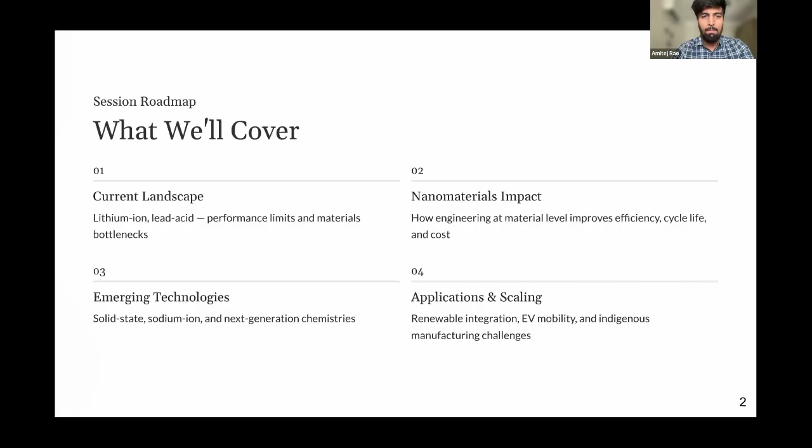So today, as we move ahead, everyone knows that batteries is the most hot topic as of now, and the reason for that is, we as the whole United Nations and as countries, everyone has to achieve net zero goals, and to achieve those goals, two most important sectors where we need decarbonization is number one, the mobility sector, because automotive transportation sector accounts for second or third largest CO2 emissions in the world. And second is the power sector.

Right now, people use coal and gas to convert heat into steam and then into electricity. So two of the major sectors which need decarbonization are the automotive or transportation sector, and the power generation sector. Now, where do the batteries come over here? So, in general, batteries can be of two types.

Number one is the primary battery. This is generally a non-rechargeable battery, which we all use in our TV remotes or AC remotes. These are non-rechargeable, like the Duracell battery. These alkaline batteries last for a lifetime, and these batteries do not need any recharging.

And the second type of batteries is the secondary batteries, which we call rechargeable batteries. These batteries can be recharged again. Example, lead acid battery, lithium-ion battery, sodium-ion battery. These are the dominant chemistries out there on the application side. So this presentation would focus on the secondary application, which is the rechargeable battery, not the primary battery.

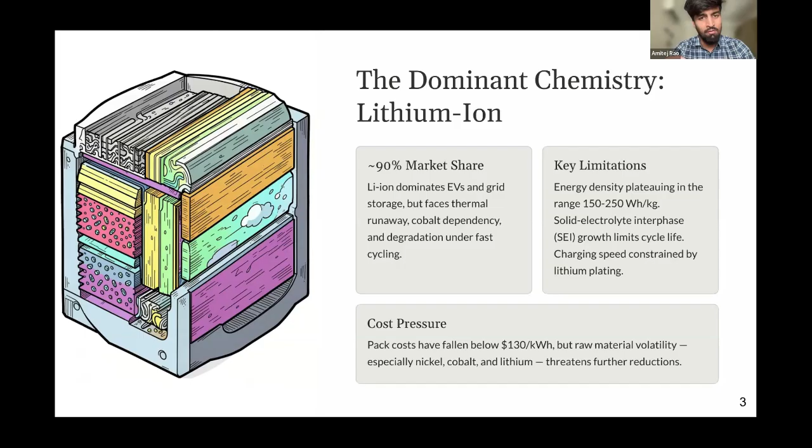And last but not least is the cost. These batteries generally use critical materials like lithium, nickel, cobalt. As of now, the costs have fallen because of high usage, but there is also shortage on the supply chain side. So the material cost is rising, and these materials are concentrated in certain geographies, and the supply chain is a vulnerable issue as of now.

So talking about the challenges, lithium-ion's number one challenge is the explosions that you've heard of. This is nothing but a thermal runaway happening inside a battery. The reason for this is lithium-ion batteries use a liquid electrolyte which is solvent based, ethylene carbonate and dimethyl carbonate. By nature, these are highly flammable and volatile solvents. If during charging or discharging the temperature of the battery rises, this electrolyte catches fire and it leads to thermal runaway, and dealing with battery fires is a different ball game altogether.

It cannot be dealt with like a normal fire. Battery fires, you've all seen the videos. It is a chain reaction, a kind of runaway reaction. It increases exponentially. Second, the supply chain is an issue, and also the solid electrolyte interphase degradation, which causes the cycle life to go down.

Talking about lead acid, solid chemistry, but it suffers from lower energy density due to a simple reason that the chemistry is not as advanced as lithium ion. It has a shorter life cycle as compared to lithium ion, but still it is able to provide certain applications which do not require that much amount of life. It is heavyweight, and the volumetric energy density is also very less. So this is a very good application.

Lead acid, still all the automotive batteries that we use, all the say inverter batteries that we use as of now, it is used in telecom industry. It is used in say golf cart, forklifts, and all the stationary applications. This chemistry is still preferred. The reason is the lower dollar value. It's very cheap.

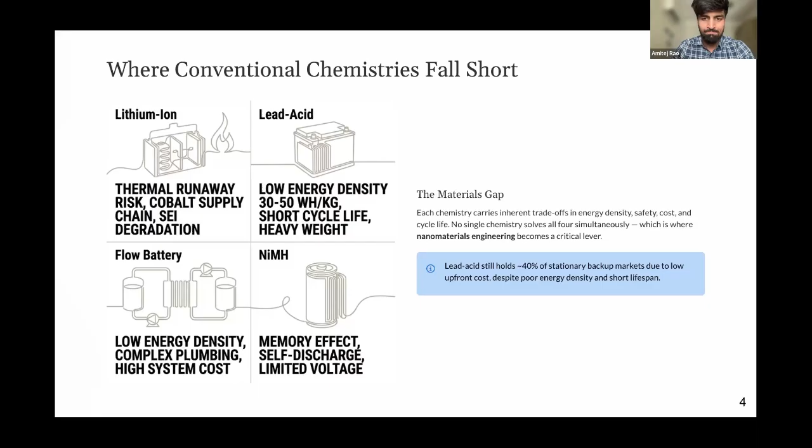So these are certain challenges, but how can we address these challenges using materials? Because this is an electrochemical device, which means that the chemical energy is getting converted to electrical energy and vice versa during charging. So the chemicals used and the materials going inside are the main crux of the energy providers. So we would need innovation, and we are doing innovation in materials to solve all these challenges. So how do we address this? Using nanomaterials, using nano engineering at an atomic scale. Number one, using some advanced materials.

In a battery, imagine that we have an electrode, right? In that electrode, there are certain electrochemical reactions which need to happen. Taking an example of say lithium-ion battery, on the anode, particularly people use graphite. In graphite, the reaction happening is the lithium intercalates between the layers of graphite. It goes and sits between the layers of graphite. Now, the amount of lithium ion stored will determine the capacity of the battery, and the speed of this storage will determine the charging speed.

So the anode materials and the cathode materials and the electrolyte materials have to have certain specific properties. When we talk about electrodes, number one, we need enhanced electrode conductivity, which is electronic conductivity and ionic conductivity. It also needs reduced internal resistance, which means when the reaction is happening, the kinetics should be much faster, and the temperature rise shouldn't be as much, because if the temperature rises, then there is a safety risk.

So number two, the anodes, which is the most important part. Right now, in lithium-ion batteries, people have started using silicon carbon composites, silicon and porous carbon composites. As of now, the challenge with graphite is it's only able to provide an energy density of around, say, 200 to 250 watt hour per kg. But when we use silicon as an anode, it multiplies by 4 times.

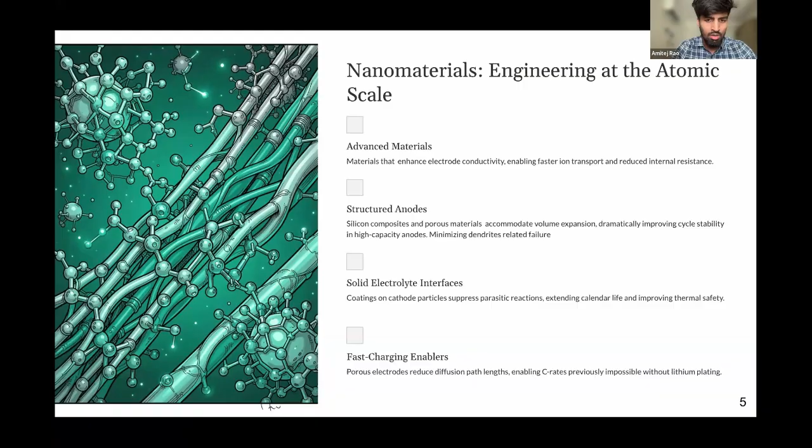So these are the different trade-offs of how to use materials. It's a very delicate balance of material properties and their impact in the electrodes, and their impact in the overall cell and the battery technology. So going forward, what advantage do we get through using these nanomaterials and all those things?

20% higher cyclic life gain. Imagine a conventional EV gives a warranty of 5 years. Using nanomaterials, we can get an easy 6 to 7 years warranty. And because of this, the total cost of ownership will go down, because the battery would now be running longer, right? So the vehicle life would by default increase.

And mind you that today, for all the EVs that we are running, 50 to 60% of the cost is just the battery cost for any electric vehicle. So the battery is the main engine. It's the heart. So if we increase the cycle life, by default, the features, the power, the vehicle OEMs increase those features using just the innovations in the batteries.

We also aim for resistance reduction by 40%. And why is this important? Again, to stop thermal runaways inside batteries, we need to minimize the risk of explosion, and we need to keep the temperature on the lower end. So we need materials and electrodes that reduce the internal resistance of the battery. And it's a very simple test, which we call electrochemical impedance spectroscopy, through which we understand the charge transfer resistance and all the resistance inside the electrode.

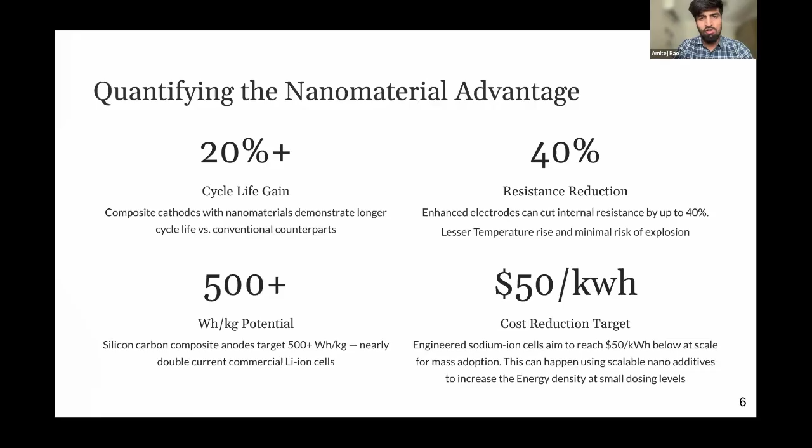So this is the challenge that we all have, and we all have to solve this through materials and design. It's an interdisciplinary sector, but as chemical engineers and as material scientists, we need to solve this issue through materials. So going ahead, what are the emerging battery technologies?

Solid state batteries. What is it? It is nothing but a lithium-ion battery, or any chemistry battery, where the electrolyte is solid, semi-solid or gel type. Right now we are using liquid electrolytes, organic solvents, which are flammable. So we need to replace those with ceramic or polymer, quasi-polymer electrolytes, which offer lower weight, meaning the energy density is going to increase, and they also provide lower flammability risk. There is no flammable material inside, so the batteries would be safe. Companies like Toyota, BYD and Solid Power are already targeting commercializing these batteries by 2027 and 2030.

So this is an upcoming thing. The only difference over here is the phase of the state of electrolyte. It's just solid rather than liquid.

Second is the sodium ion systems. We all know lithium supply chain is a vulnerable issue. We need to shift from critical materials to materials which are abundant in the earth. Sodium is 200 times more abundant in the earth's crust as compared to lithium, and the cost is also very less. And India has a lot of reserves of sodium as compared to lithium.

People have found lithium reserves somewhere in Bangalore and somewhere in Jammu, but that is still in the exploration stage. Getting to the exact mining stage is going to take at least 20-25 years, and that is a long time for any battery chemistry to sustain, right? And we cannot be dependent on other countries like China, because 95% of all the battery materials are routing through China only. They own the mines. So we need to shift to chemistries which have more abundant materials.

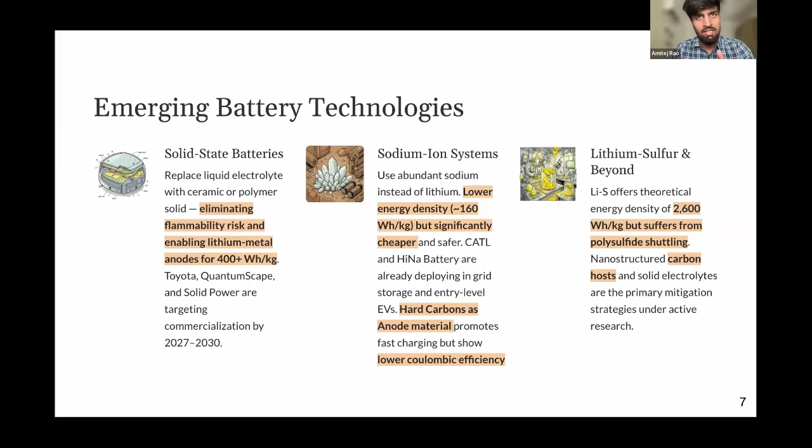The real world applications: number one, we all know that to achieve the net zero goals, we need solar, we need wind. These energy generation sources, solar and wind, are very intermittent in nature. Solar only runs for say 8 hours in the day, and in the night time it does not provide any electricity. So what is the solution? The solution is that we need to store the excess energy inside batteries and use it during the night time. So storage is important to address the intermittency issue of these technologies, wind and solar.

And these batteries need to be such that the dollar per kilowatt hour is lower, and they provide stable 4-hour duration storage. That is the normal storage that we need.

Second application, electric mobility. The most important factors when it comes to mobility are energy density, charging speed, and safety, safety being the most paramount factor here, because if we provide cells which are low quality, which do not have those kinds of safety standards, it is going to result in more and more catastrophes, and in lower adoption of EVs, and we will not be able to meet our net zero goals by 2030 or 2047.

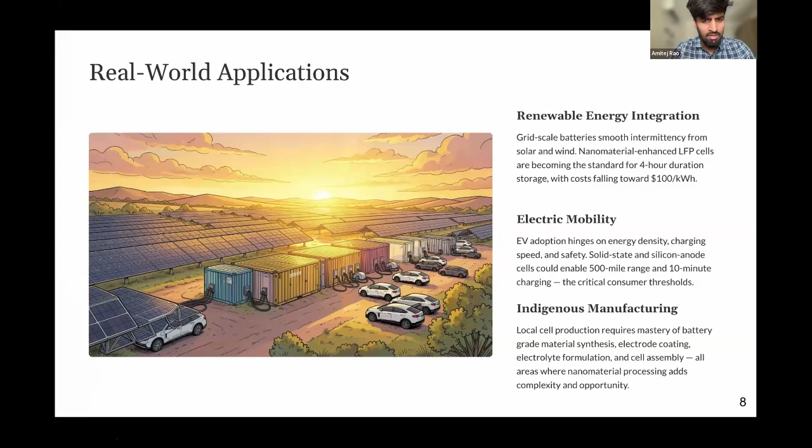And with nanomaterials, sometimes the processing techniques are actually very complex. Scalability is an issue. So challenge number one, scalability. At lab scale, we all know a lot of innovations happen every day, but these nanomaterials are difficult to produce consistently at ton scale. Important parameters like process control, purity, and cost still remain a barrier to commercializing these materials. So we need extreme customization and engineering to take this material from lab scale to pilot and then to commercial scale, all within an acceptable cost range, so that we can make its adoption easier and acceptable to the market without changing any processing lines.

Another challenge is that these chemistries still use critical materials: lithium, cobalt, nickel. They are not going anywhere, because we depend on these materials for the chemistries, even sodium ion, lithium sulfur, solid state, and lithium ion. And these materials are concentrated in very few geographies. Cobalt comes from a very small region of Congo, and we've all heard of atrocities happening to the laborers there in cobalt mining. Most of the lithium mines are owned by China as of now, so the materials route through China to other countries. So we need supply chain resilience there too.

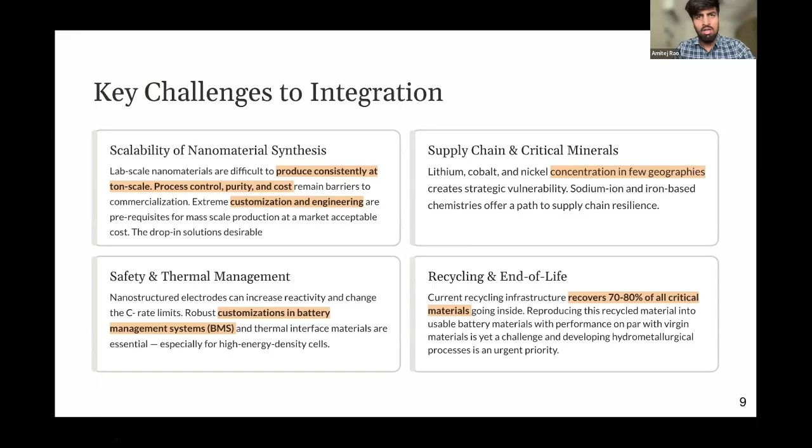So this is a different sector, a different lane where the innovation should happen. Along with materials, we need other processing techniques in recycling, and companies are doing that here in India, and we have a couple of peer startups doing that.

So what are the key takeaways? That materials are the lever. We have to innovate inside batteries to address all the challenges using materials, and there is no single winner. It's a coexistence of batteries. Be it lead acid, lithium ion, sodium ion, anything, they will coexist. There's not going to be a single winner, and everyone will be suited to its own application based on the features it gives.

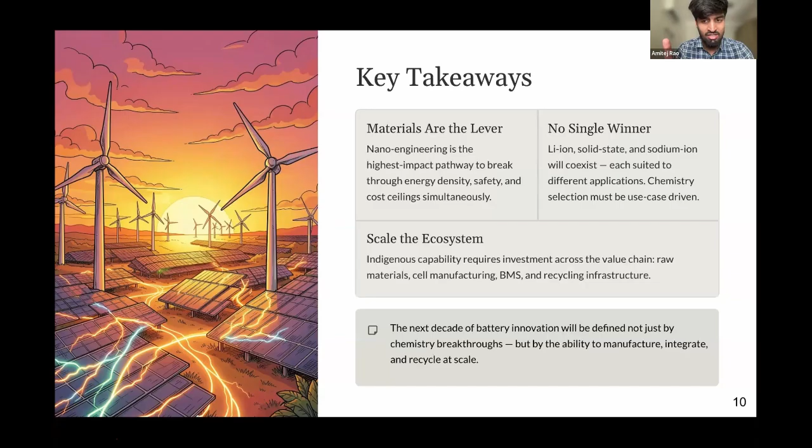So the selection of battery chemistry for a specific application has to be driven by the use case. And again, we need to scale the ecosystem in such a way that we develop an indigenous capability of developing materials, cell production, BMS, and recycling here in India. Then we have our goal of a whole battery ecosystem innovation by the next decade, using materials and chemistry breakthroughs, given that we're able to manufacture and integrate here in India. So these are the key takeaways.

Now I'll just dive into what we do as a startup.

Our company's name is Cancrie. It's a nanomaterials company. It manufactures a new class of engineered nanocarbons, and we use lignocellulosic feedstock. As of now, a lot of these materials use fossil fuels like crude oil and coal to convert into nanocarbons and other types of carbons.

Into carbon blacks specifically, which again accounts for more greenhouse gas emissions. So we need to use the current agricultural and industrial wastage that happens and upcycle it into nanocarbons, then use it inside batteries to get higher efficiency.

So yeah, we are manufacturers of nanocarbons. We have our manufacturing plant here in Jaipur. These nanocarbons go inside the cathodes and anodes of batteries, be it lead acid, lithium-ion, or sodium-ion, and it provides superior performance, longer life, and faster charging in the batteries.

Our main vision is making a sustainable energy transition. That's why we have chosen agricultural waste and industrial waste, not petroleum. We need a sustainable energy transition, and it provides higher efficiency, higher Coulombic efficiencies, and higher discharge rates using these nanocarbons. Our process is patented.

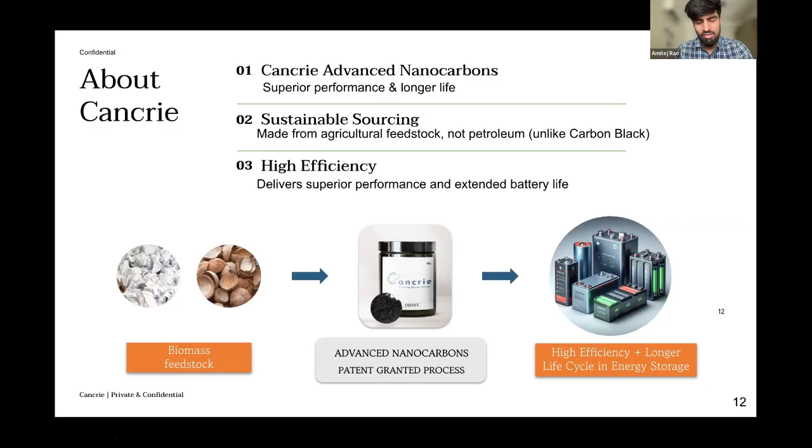We actually have 4 patents in this technology, covering the product, the process, and also the usage of it, the dosage of it inside the batteries. This is a glimpse of our manufacturing plant.

Again, the challenge I was talking about is manufacturing it at a commercial level. We started at a very small batch, say 1 gram, to now a scale of say 1 ton. It has been a very challenging and learningful journey for us, where we had to sit with the engineering guys and the vendors of equipment, and now we say that we've come to this plant after dedicating almost 3 years of research and industrial scale research.

All the machines that you see over here are developed in India, customized in India, and self-engineered. So we proudly say that we have achieved scalability of these nanocarbons using the ecosystem that we have in India, not depending on European or Japanese equipment.

The plant that we have is spread across 25,000 square feet, and we use all state-of-the-art machines. Our plant is also authorized by the Pollution Control Board (CPCB) as we use zero liquid discharge ETPs and a tertiary, 3-stage scrubber to maintain all the limits, ensuring CO2, CO, and particulate matter are within CPCB limits, and we've gotten the consent to establish and the consent to operate for this plant.

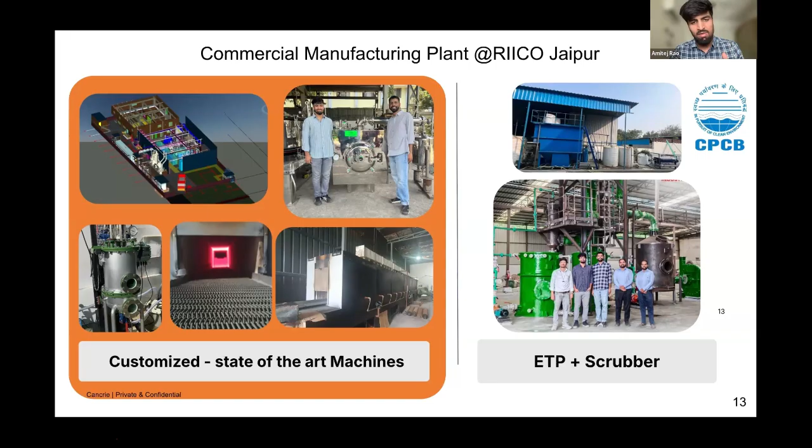We're exporting it to Oman and to the USA. So we are trying to make a company here in India where the material is made here, but it is used outside. It's an export quality, battery grade material, which is counterintuitive, because right now people are using battery materials that are imported from European and Chinese countries.

We are trying to create an ecosystem where we develop the material here in India, but we sell it outside. This is the thought process behind developing this material.